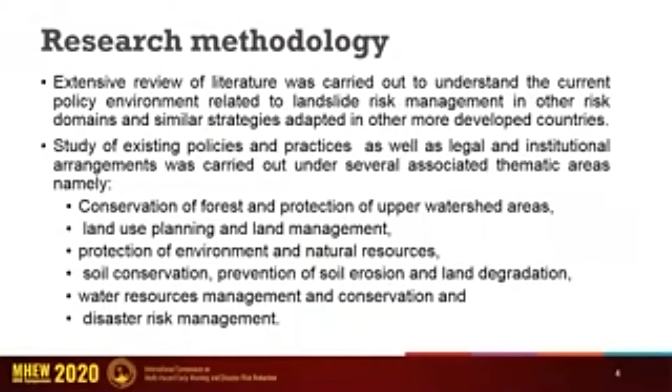Research methodology. First, we carried out an extensive review of literature to understand the current policy environment related to landslide risk management in other risk domains, and also similar strategies adopted in more developed countries. We studied the existing policies and practices as well as legal and institutional arrangements under several associated thematic areas: conservation of forest and protection of upper watershed areas, land use planning and land management, protection of environment and natural resources, soil conservation, prevention of soil erosion and land degradation, water resource management and conservation, and disaster risk management.

Then we carried out field studies to collect primary data to understand the types of landslide vulnerabilities, level of existing risk, and reasons for gradual risk enhancement. This was followed by a study based on secondary data collected through stakeholder consultation. It covered the relevance of current policies and practices to landslide risk management, challenges in administering them, current level of compliance, reasons for poor compliance, and effectiveness of the institutional setup. A national level validation workshop was organized at the final stage of the project with the participation of around 100 attendees comprised of representatives from government, semi-government institutions, academia, INGOs and NGOs, and media.

The pilot area selected for field studies. We have discovered during the study that out of all landslide-prone districts, Badulla district has shown highest vulnerability to landslides. It has more information coverage in terms of hazard maps, special investigation reports, landslide studies, etc. So it was decided to carry out the study based on Badulla district. Since the study period was limited to one year, four most vulnerable divisional secretariat divisions, namely Badulla, Haputale, Haliela, and Haldummulla, were selected as pilot sites for the study.

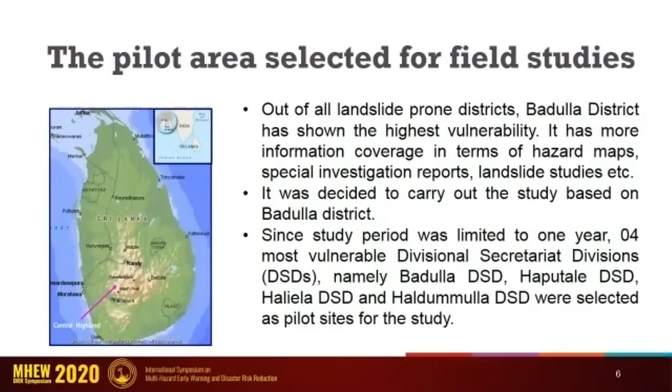Let me go into the findings of the study quickly, which gives us the essentials for creating an enabling environment. During the field visit, it was observed that there are several inappropriate practices, mainly associated with land use and land management associated with higher slopes. There are also implementation gaps that do not support efficient management of landslide-prone areas. It is obvious that if such practices are continued, the landslide risk will grow exponentially in future, and managing the risk will not be technically feasible or economically cost-effective.

The study revealed that a number of policies of relevance are in existence as various enactments, ordinances, and regulatory frameworks. But since most of them came into effect before the enforcement of the Sri Lanka Disaster Management Act No. 13 of 2005, there is only a little mention about disaster risk management. There is an essential need to integrate the subject of landslide risk management into the scope and the subject areas described in various enactments in an appropriate way.

We feel it is essential to introduce operational and administrative guidelines spelling out the responsibilities and the accountability of various executing agencies and authorities responsible for disciplines such as human settlement, land use planning, housing and building construction, roads and infrastructure development. The current legal status of the focal agency for landslide risk management, the National Building Research Organization, is a research organization. It is a significant weak point for functioning effectively as the focal point, although they possess the necessary technical competency.

The other notable point is that the current system usually relies on conventional engineering solutions for landslide risk mitigation, but it provides limited answers to some problems, in particular at community and household level. It is necessary to explore other possible options, such as nature-based solutions and hybrid solutions, which offer a set of viable, cost-effective, and environmentally friendly solutions.

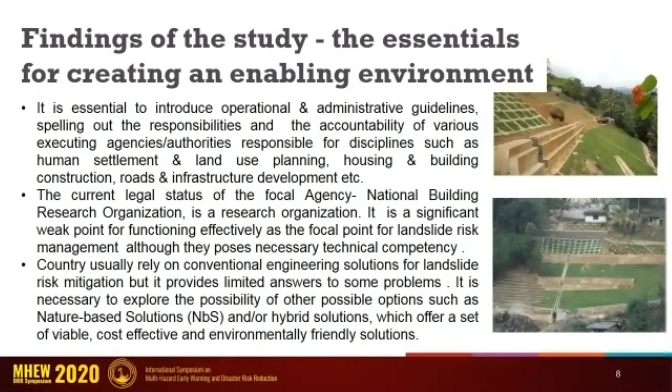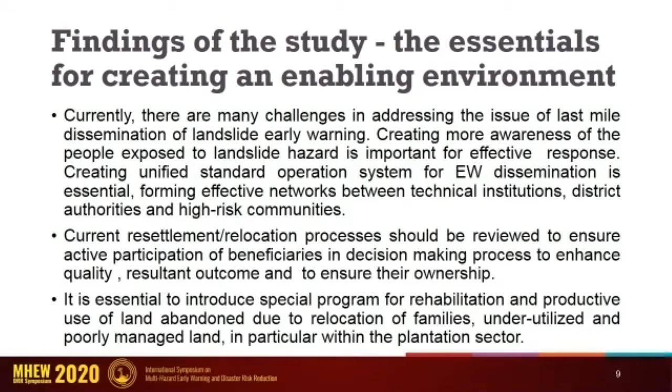Currently, there are many challenges in addressing the issue of last-mile dissemination of landslide early warning. Creating more awareness among the people exposed to landslide hazard is important for effective response. Creating a unified standard operating system for early warning dissemination is essential, forming effective networks between technical institutions, district authorities, and high-risk communities.

We also feel that the current resettlement and relocation processes should be reviewed to ensure active participation of beneficiaries in the decision-making process to enhance quality of the resultant outcome and to ensure their ownership. It is essential to introduce special programs for rehabilitation and productive use of land abandoned due to relocation of families, as well as for rehabilitation of underutilized and poorly managed land, in particular within the plantation sector.

At the end, I wish to present the following conclusions. Poor technical understanding, implementation gaps, and institutional weaknesses were observed to be the main reasons for lack of compliance with current policies and procedures. Hence, it is essential to introduce an effective system for administering them and also a mechanism for regular monitoring in future. The current legal status of the NBRO as the focal agency for landslide disaster risk management is desired to be upgraded so that NBRO will be able to function as a monitoring agency while discharging its current technical function.

The policy reforms recommended should be considered as a progressive approach that will reduce the existing risks, not allow creating future risks, and be capable of meeting the consequences arising due to events that are unpredictable. It is essential to pay more attention to the aspect of reduction of future risk. If it can be managed well, it can be the cheapest way to reduce landslide risk. But obviously, it is the most difficult.

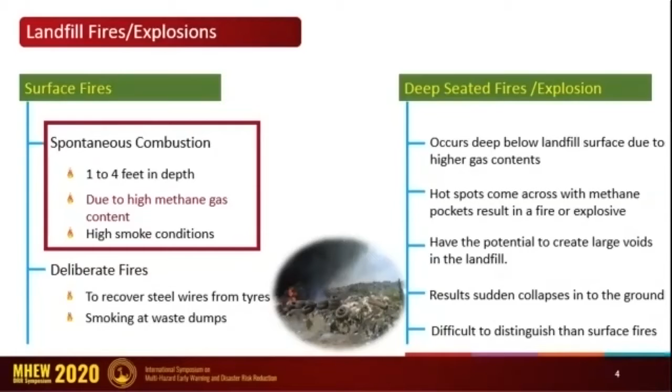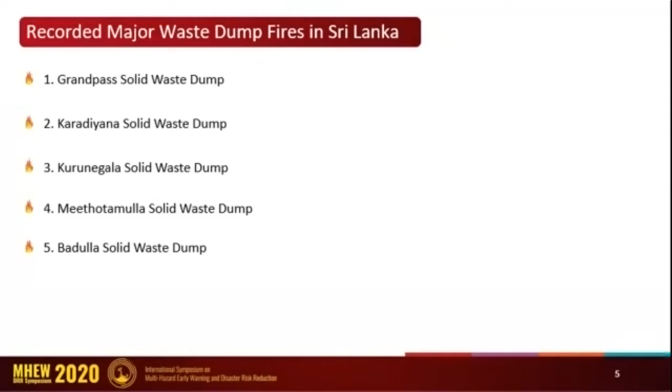Now I focus you on major waste dump fires in Sri Lanka. According to my detailed study, a lot of waste dump fire incidents were recorded in Sri Lanka. The major five incidents are listed here. The first one is Grandpass solid waste dump. Grandpass is a very old waste dump and now it is fully closed down, but a certain number of waste dump fires were recorded within the past few years.

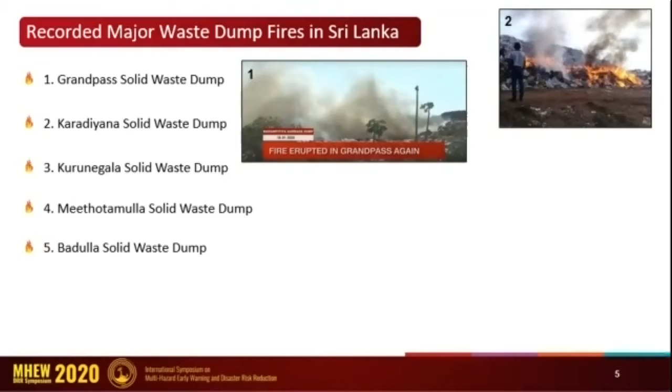The second one is Karadiyana solid waste dump. Karadiyana is the largest active waste dump in Sri Lanka. The third one is Kurunegala solid waste dump. The fourth one is Meethotamulla solid waste dump. It is a deadly disaster. And the fifth one is Badulla solid waste dump.

When we move to Karadiyana waste dump, it is an active waste dump and we measured gas content at 1 foot below the surface. Here methane gas content varied from 8 to 15%, carbon monoxide gas content was 195 ppm and hydrogen sulfide gas content was 13 ppm.

When we move to Meethotamulla waste dump, it is also a closed waste dump and we measured landfill gas at 1 feet below the surface. Here methane gas content varied from 5 to 20%, carbon monoxide gas content was 19 ppm and hydrogen sulfide gas content was 27 ppm.

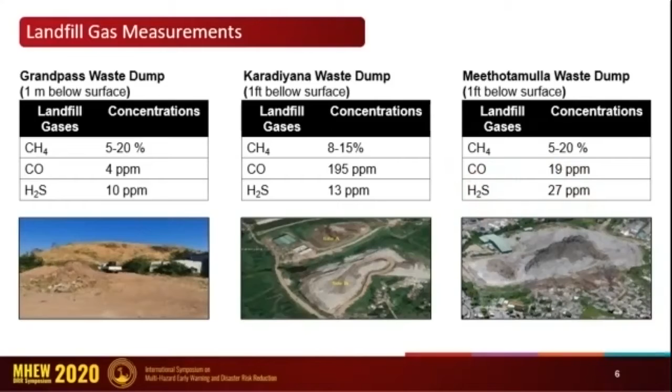Now I focus you on the Meethotamulla waste dump collapse. It was a deadly disaster. The dump collapsed in 2017. At the time of collapse, the height of the dump was 48 meters and the volume of the dump was 1.2 million cubic meters. The collapse resulted in the death of 32 and 11 missing residents. These figures show the Meethotamulla dump collapse and its results.

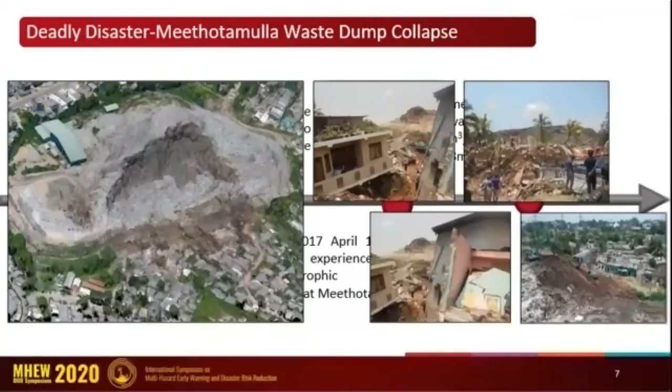Okay, after the Meethotamulla dump collapse, several fire incidents were recorded. The collapse was recorded on 14th April 2017. The first fire incident was recorded on 17th November 2017. The second fire incident was recorded on 1st January 2018. Likewise, a series of fire incidents were recorded.

After we decided to rehabilitate Meethotamulla waste dump with a landfill gas management system, we did a few studies about available landfill gas management systems. Finally, we found there were two types: passive gas collection and active gas collection. For passive gas collection, the only advantage is that it is relatively inexpensive compared to an active gas collection system. The major disadvantage is that gases are directly vented to the atmosphere. This is the passive gas collection system.

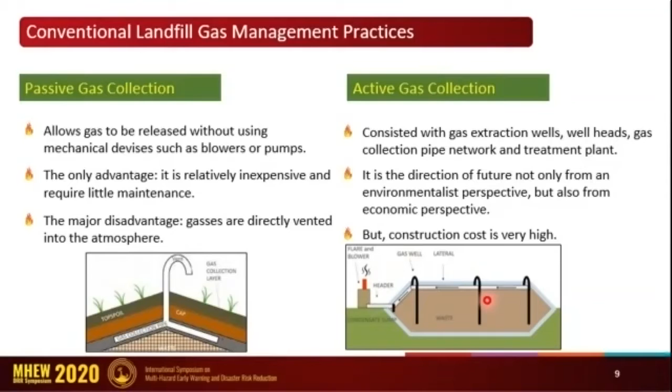When we move on to active gas collection, the collected gases are not released to the atmosphere. So this is the active gas collection, and it is very costly compared to passive gas collection. In addition to that, we studied the landfill gas well installation process. Usually, landfill gas extraction wells are installed in the initial stage of the landfills.

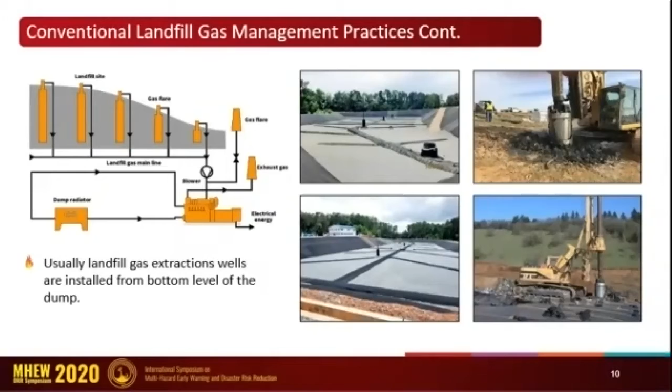The third one is frequent fires and hazardous gas releases. It will be a safety risk for the workers. The fourth one is financial constraints, because as a developing country, we don't have a big economy. But this kind of rehabilitation work involves several billions. Another issue is lack of free space. There was no free space for waste handling.

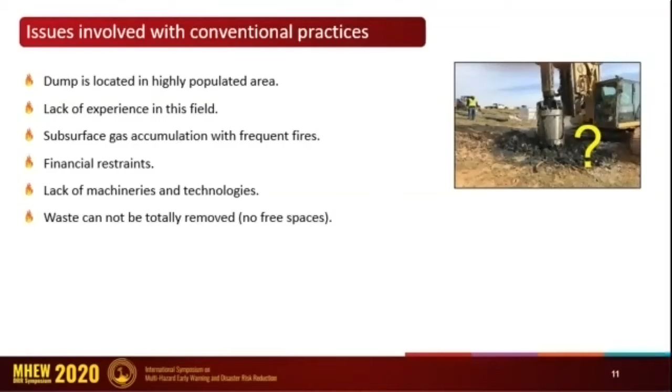Likewise, a series of issues were raised. But anyway, we were able to find suitable solutions for all the issues. So now we have come to the next point, and from here onwards I will describe my approach for gas extraction well installation. As I described in the previous slides, the typical gas well installation methods could not be directly applied here. As the responsible authority in the management of this waste dump, the Urban Development Authority needed to use this rehabilitated waste dump as an urban park.

So they had their own landscape design. Then we had to integrate our plans with their requirements. So this is the reshaped dump and this is their requirement. As the initial step, we allowed them to complete their works. After that, you can see this is the landfill gas installation method. Here, what we did was excavate a trench.

The width of the trench varied from 2 meters to 3 meters, and this is the typical gas well. We use an HDPE pipe, and this is the barrel, and we filled 40 millimeter gravel, and the pipe and barrel were both perforated, as you can see. The normal height of the gas well was 8 meters. It varied from 8 to 10 meters. So this is the approach we practice in the Meethotamulla waste dump.

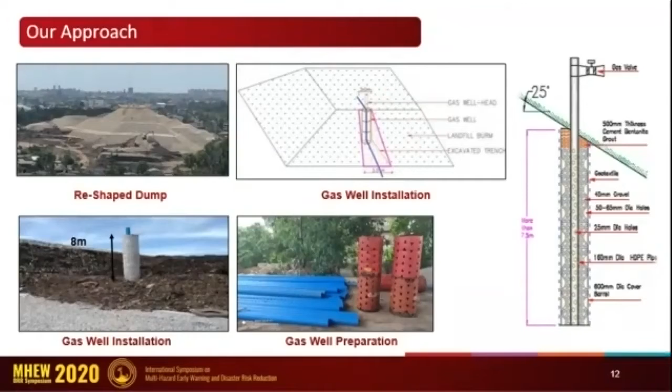As I mentioned in the previous slides, we are going to install 24 gas wells in the waste dump. Then we can cover the entire waste dump. These red dots indicate the gas wells. The distance between two gas wells is 20 meters. All the gas wells will be connected by a pipe network and directed to an in situ gas burning system. In addition to that, we have planned to install an automated gas monitoring system.

Then we can monitor the gas content using our mobile phones. This is an air quality monitoring system already developed by NBRO. This figure shows the cross-section view of the dump. The vertical pipes are gas wells, and these horizontal trenches will be used to collect leachate. This is the approach we are practicing at Meethotamulla now.

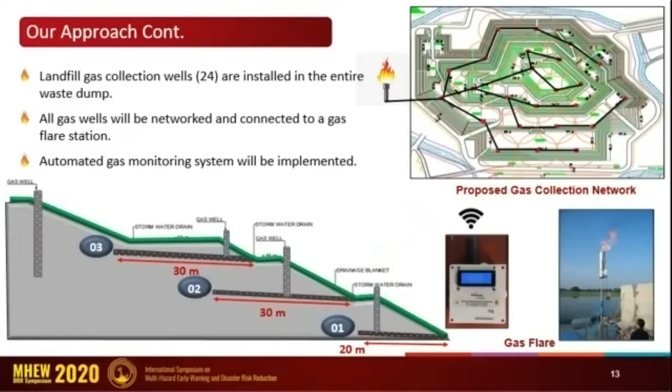Okay, let's move to the gas well performance. As I mentioned in the last slide, we have already installed a few gas wells inside the dump. Here you can see a gas well we have already installed. If you focus on the right side graph, you can see some gas wells are performing very well. For example, gas well 1 is emitting 45% methane.

That means we have limited landfill gas emission to the gas well areas. For example, you can see the gas well 1 area, gas well 2 area, and 3. The emission rate is high. In other areas, the emission rate is very, very low. That means it will release the internal pressure through the gas wells. Then it will reduce the fire and explosion risk in the waste dump.

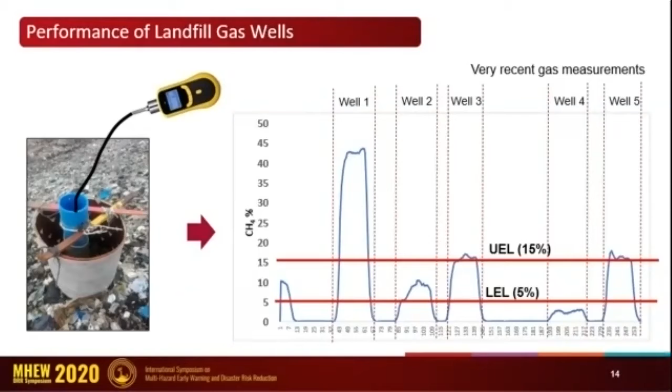Okay, here I'm going to do a small comparison of physical observation before installing gas wells and after installing gas wells. Before installing, frequent fires were recorded and workers got sick frequently. The surrounding people were sick frequently. Cracks propagated on the waste dump soil cap, and other problems were recorded. Plants were not growing on the dump. You can see some dried grasses.

But after installing gas wells, no fire incidents have been recorded yet, and greenery areas increased. There are a lot of grasses on the waste dump now, and fewer odor problems. That means we have achieved our main objective by reducing the fire and explosive risk at the site.

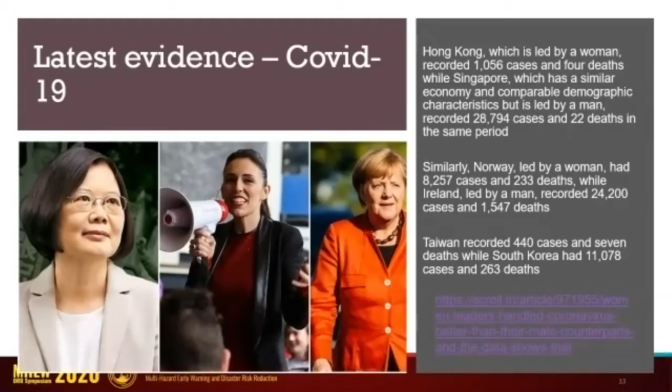With the latest evidence from the COVID-19 pandemic, successful women's leadership has shown effective disaster risk reduction measures. Hong Kong, Norway, Germany, and Taiwan are some of the evidence. However, still we are behind the target. There are many gaps remaining in the process of mainstreaming gender into DRR design, planning, resourcing, and implementation.

The reasons for the minimal level of results were identified based on the literature review. 15 different challenges were identified as barriers that prevent mainstreaming women in DRR leadership and decision making. Education, socio-cultural beliefs, religious beliefs, household income, lack of role models, family structure and support, poor image, occupational segregation, networks, household workload, policies and regulations, organizational culture, political environment, patriarchal culture, and self-interest are the barriers.

The next steps. The study will continue conducting semi-structured interviews and data analysis, and expects to write a scientific paper and a position paper.

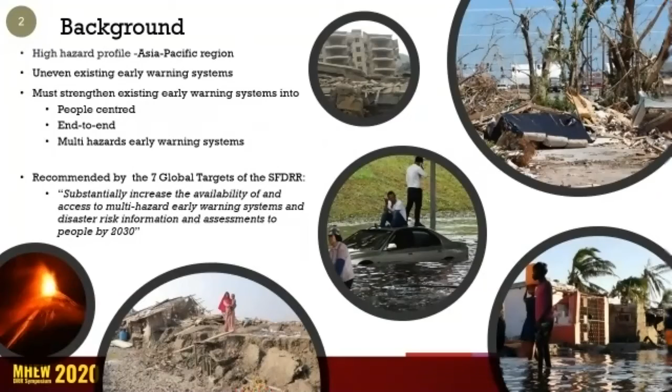Therefore, the challenge is to broaden the existing single hazard early warning system and to provide a comprehensive multi-hazard framework with regional level cooperation by capacity development among higher education institutions, through conducting scientific research, development of knowledge bases, and providing advocacy to inform policy and practice. This effort has been fulfilled by the Project CABARET, which is Capacity Building in Asia for Resilience Education, with the support of the European Commission, putting together 15 partner institutions representing European countries as well as Asian countries.

Accordingly, the project sets 5 specific objectives. First, to identify intra and interregional cooperation capacity needs across partner countries. Second, to create an innovation hub. Third, to develop a capacity building roadmap in order to address regional gaps and priorities.

And fourth, to explore, promote, and initiate opportunities for fruitful university partnership with socioeconomic actors. And finally, to develop innovative multidisciplinary training courses tailored for rapid skill acquisition for professionals from the higher education institutions.